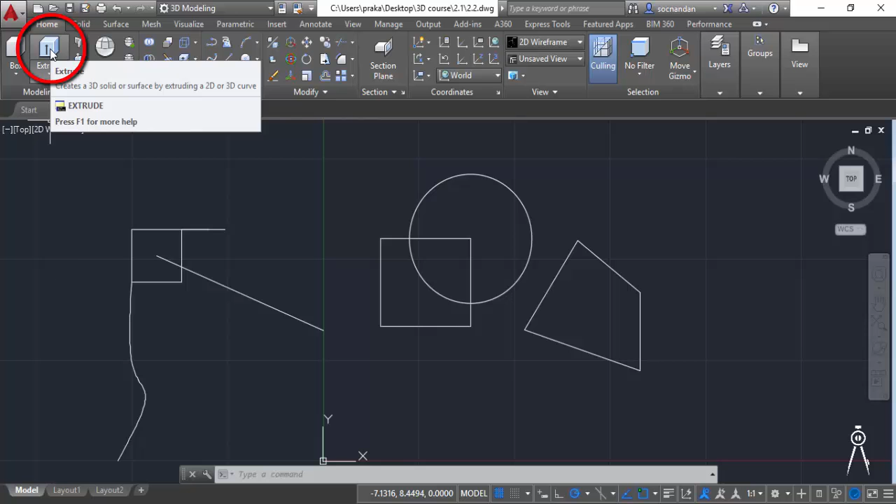You can start the extrude command from the home tab and modeling panel. Using this extrude command, you can add a z-axis or thickness to any 2D geometry. Let's take the example of these two geometries: here we have a rectangle made with the polyline command, and here we have a circle. Right now these two are only 2D geometries made in the XY plane.

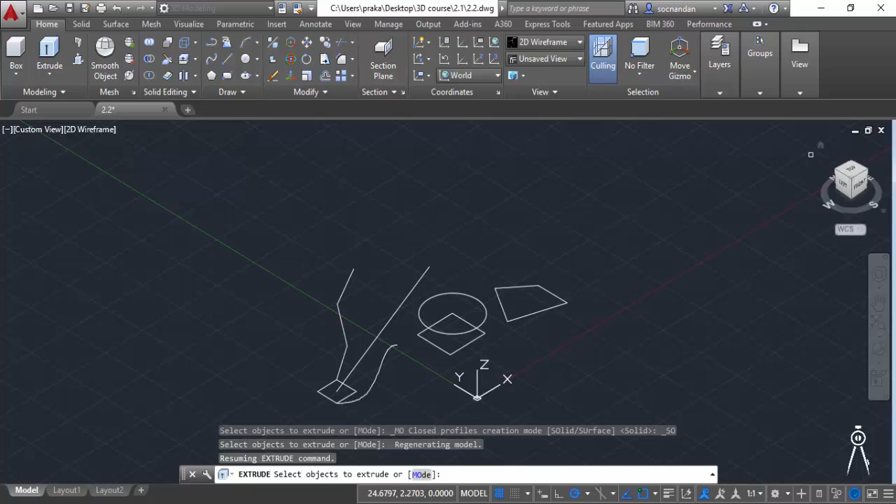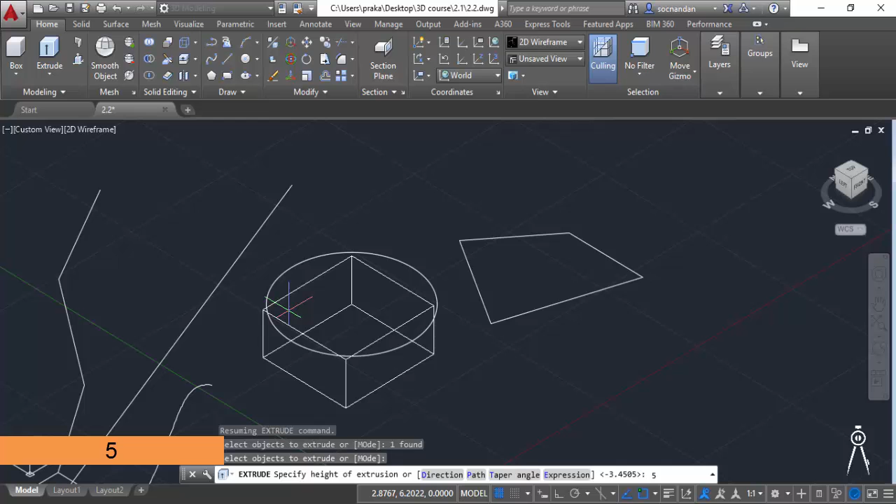Let's click on this home icon to move to the XYZ axis, and now let's click on this rectangle, then press enter. Once you press enter, you'll notice the object starts moving in the Z axis as well, and you can move it either downwards or upwards, or directly enter the height for this geometry. Let's say I want to enter a height of 5 units, so type 5 and press enter, and the object has been created in 3D.

You can change visual style to see the effect here. So right now this is the object which we have made. Let's press Ctrl Z to return back to wireframe style.

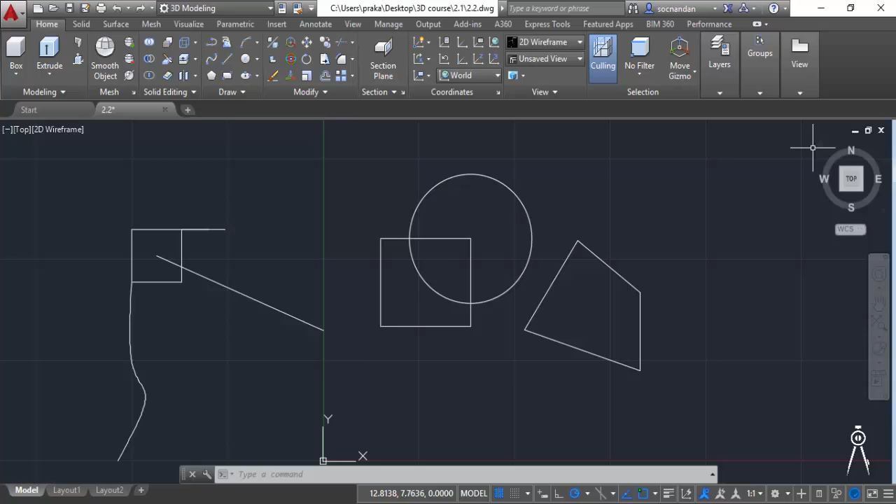You can also use this command with the circle. Let's press Ctrl Z again, and now let's click on this home icon. Here we have this geometry. Let's go to the extrude command, and this time select the circle and press enter. In a similar way to the rectangle, extrude this circle, and here we have it.

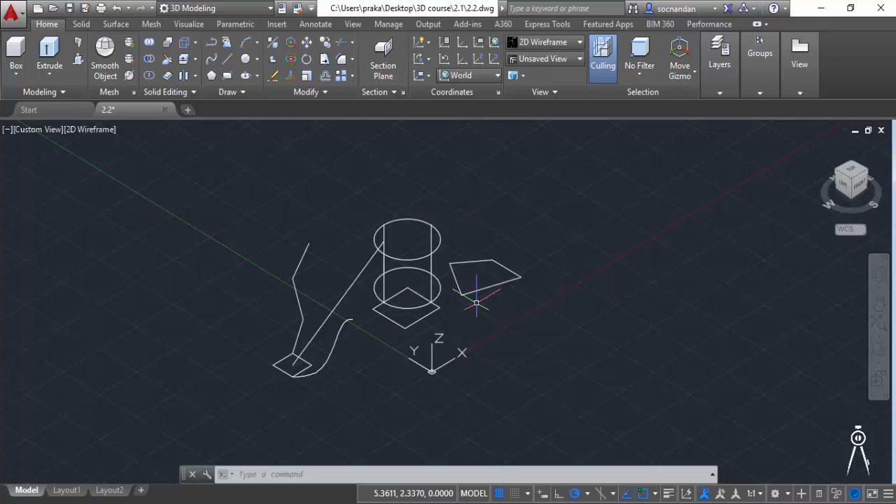In both cases the geometries are closed and they are a single geometry. But let's look at this geometry here, made with different lines. Although this geometry is closed, it's not a single geometry, so you cannot use the extrude command for this.

When you click on any single line, you'll only be able to extrude that single line or object, and it will make a surface instead of a solid. When you hover your cursor over that object, you'll see that it's a surface. But in the second case, when you hover your cursor here, you'll see that this is a 3D solid.

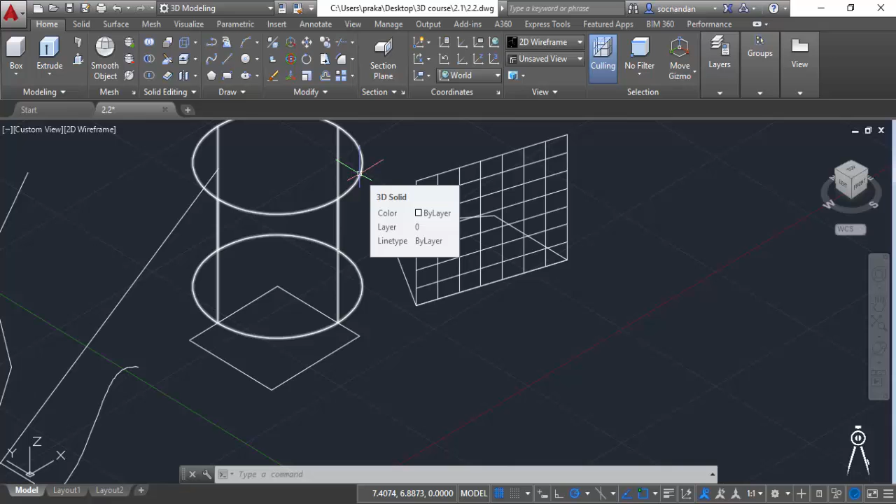Let's now erase these geometries, and see what happens when we use the extrude command with different functions. Here we have some random lines in the Z axis, and we have this rectangle here. Let's first start with the extrude command, select this object, click on it, and press enter.

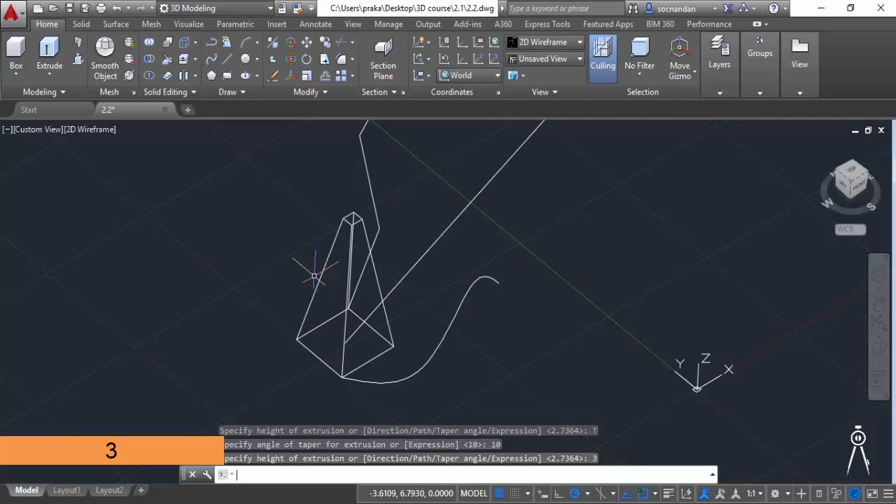So now we have this normal extrude command, but in this case let's select taper angle from the command line and enter an angle of 10 degrees, press enter. Now you'll notice that when you move your cursor upwards, it will start tapering from the original vertical line. The taper angle is 10 degrees with respect to the vertical line, which is the Z axis in this case. Now we can enter the height, so let's enter a height of 3 units, press enter, and the geometry has been made with taper.

Let's press Ctrl Z to return back. Now let's select extrude command again, click on this rectangle, and press enter. Instead of taper, we can also select a direction in which this extrusion will be made. Let's click on front view so you can see it more clearly. Right now it's moving in the upward direction, but you can select the direction of a line for making this extrusion.

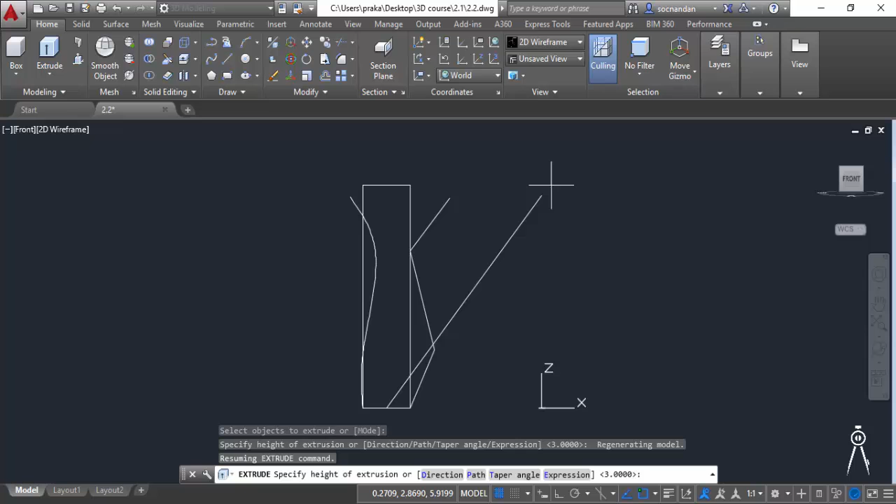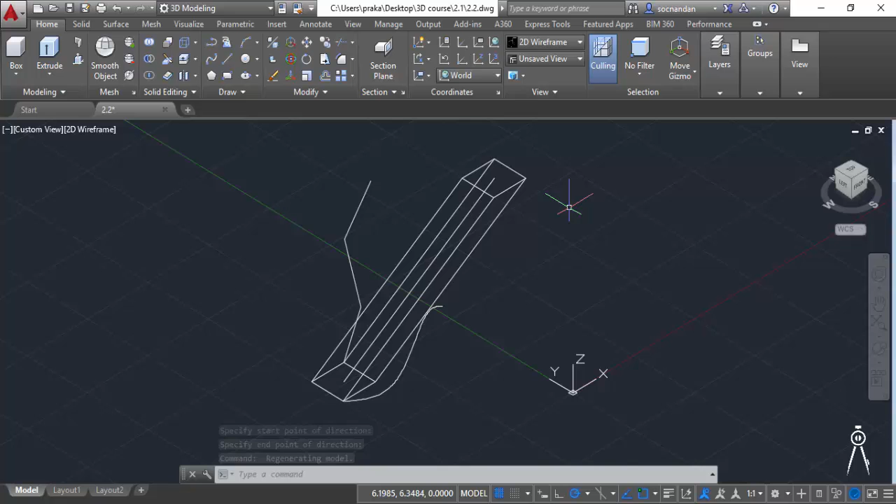For that you need to select direction. Click on direction, and now specify the start point, which is this one in this case, and then the end point. The object will be made along the direction, and the length will also be equal to the length of the direction line which you have specified. Let's press Ctrl Z to return back.

Now let's see what other options we have for extrude. Select extrude command again, select this geometry and press enter. Now we can specify a certain path for making this extrusion. Here we have an option for path. Let's select path, and now click on this polyline. When you look at the front view, you'll see that the extrude has been made along the path which we have created.

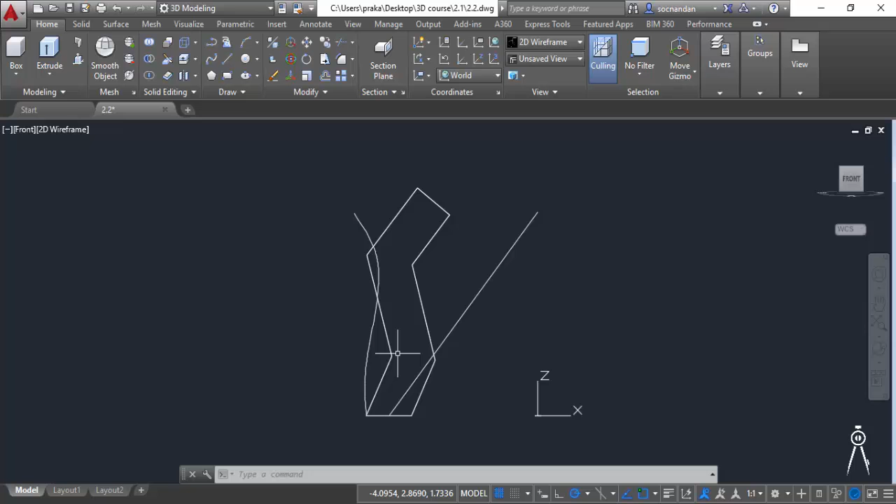This is the path which was created with a polyline, but this is not a restriction — you can create a path with a spline or other geometries as well. For example, here we have this absolutely random shape created with a spline. Let's see what happens if we create our extrusion along that path.

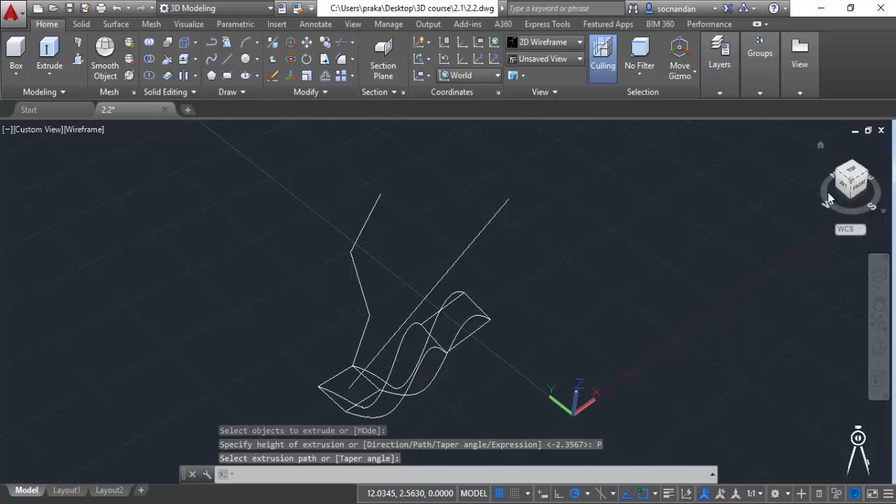Let's go to extrude, select this rectangle, press enter, select path from the command line, and click on this path. Now here we have a very random geometry which has been created along the path we selected.

In this way you can create an extrusion along different types of paths as well, but make sure that this path is not too complicated, otherwise your geometry will not be made. Also make sure that the cross section of the rectangle or base geometry for extrusion is within the limits of this direction or path.

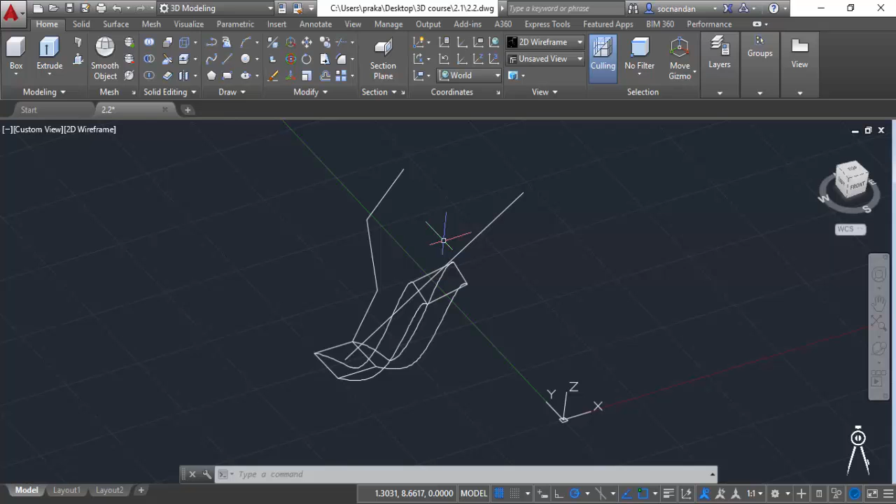In the next lesson, I will tell you about the presspull command of AutoCAD.